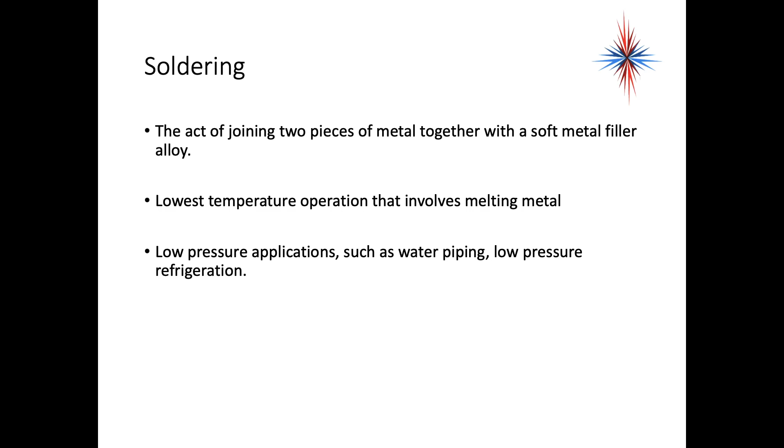For good capillary attraction, there should be a space between the metals of about 0.003 inches—a very small gap. Solder is a soft filler metal. Capillary attraction is when the liquid metal is pulled into a small crevice on its own, or with a little help, like putting a heat source on it. Solder flows between the two metals with capillary attraction.

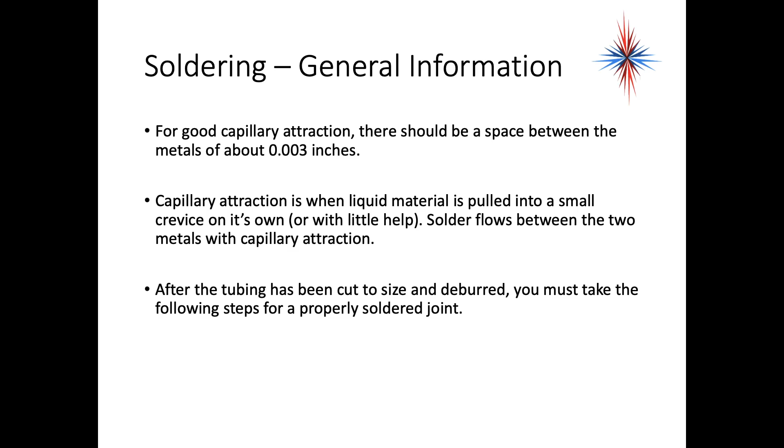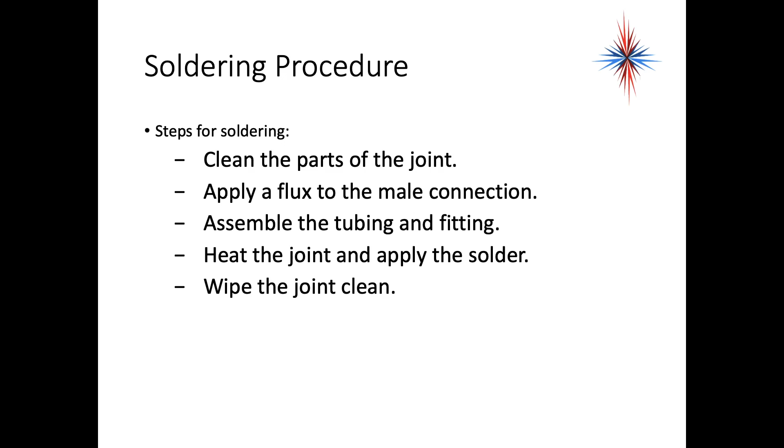After the tubing has been cut to size and deburred, there are specific steps you have to take for properly soldering a joint: clean the parts of the joint, apply flux to the male connection, assemble the tubing and fittings, heat the joint and apply the solder, and wipe the joint clean. All of these must be accomplished.

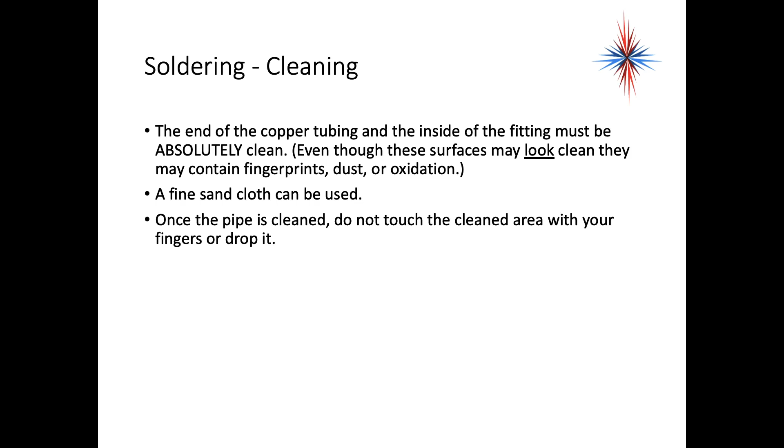The end of the copper tubing and the inside of the fitting must be absolutely clean. Even though these surfaces may look clean, they can contain fingerprints, dust, or oxidization. A fine sand cloth can be used. Once the pipe is cleaned, do not touch the cleaned area with your fingers or drop it—you'll make it dirty again.

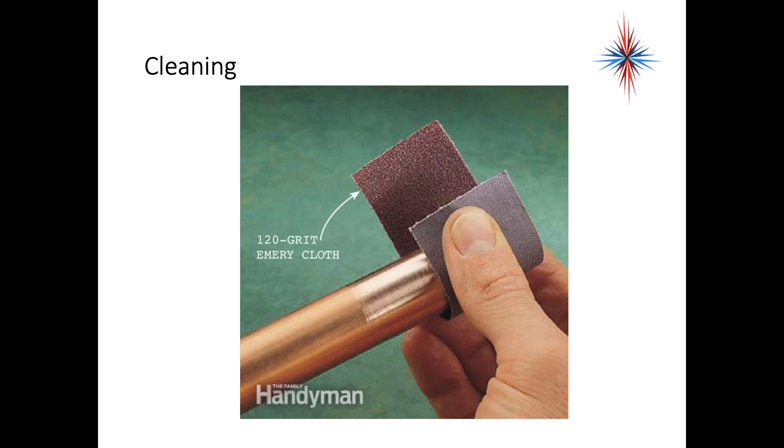So once again, we're using 120 grit emery cloth paper and sanding down the outside. If you can see any areas that are not like the clean metal shown in this slide, your pipe is not clean enough—it has to be perfect. Clean the inside of any fittings as well, using a wire brush or a rolled up piece of emery cloth.

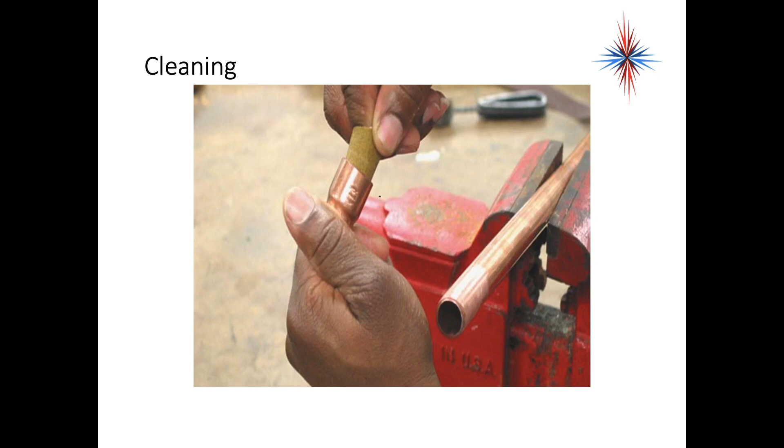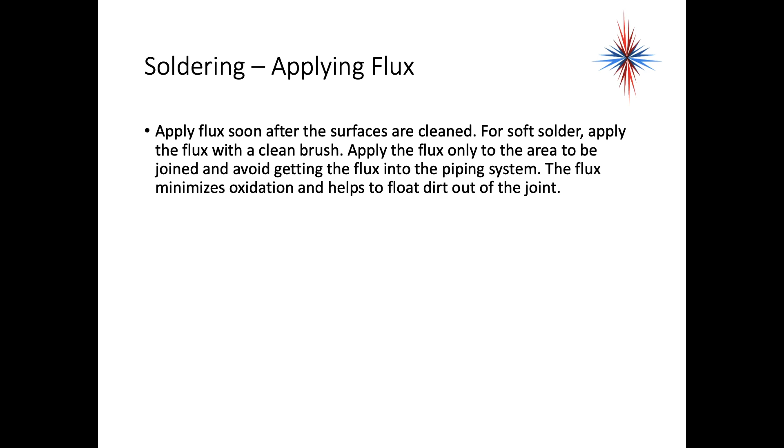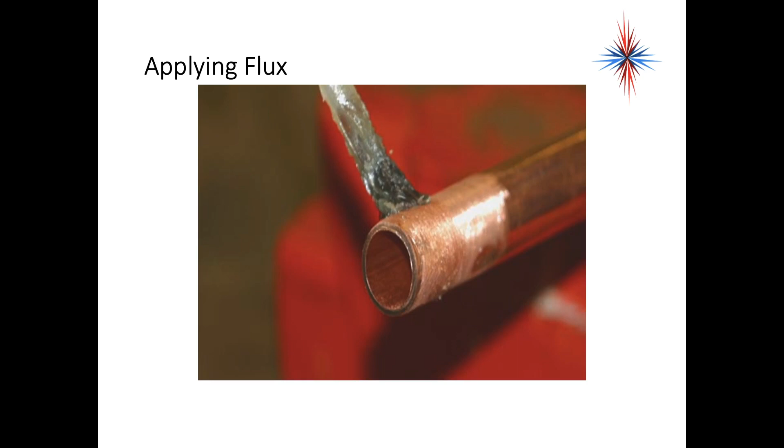Apply flux as soon as you clean the surfaces. For soft solder, apply the flux with a clean brush, only to the area to be joined, avoiding getting flux into the piping system. The flux minimizes oxidization and helps float dirt out of the joint. Always put it on the male end of the fitting, not on the female components. You don't need a ton of it, but it needs to be coated properly.

Soon after the flux is applied, assemble and support the joint so it's straight and will not move while being soldered. Solder cannot handle moving parts while it is cooling—it needs to be straight and supported.

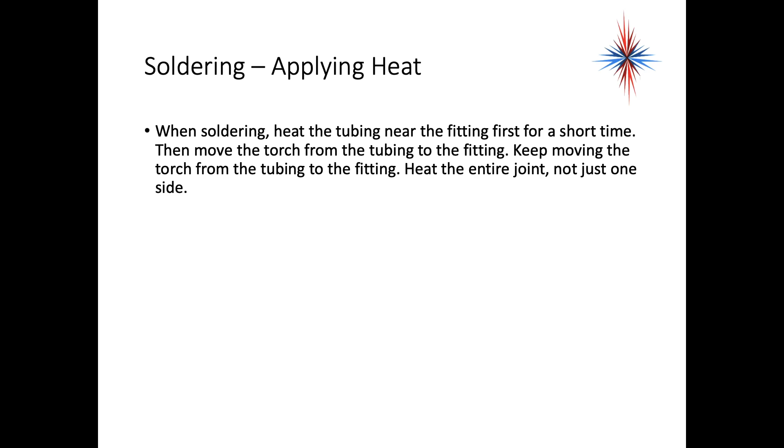When soldering, heat the tubing near the fitting first for a short time, then move the torch from the tubing to the fitting, back and forth, heating the entire joint, not just one side. Spread the heat evenly and do not overheat any single area. Don't point the flame into the fitting socket—hold the torch so the inner cone of the flame just touches the metal.

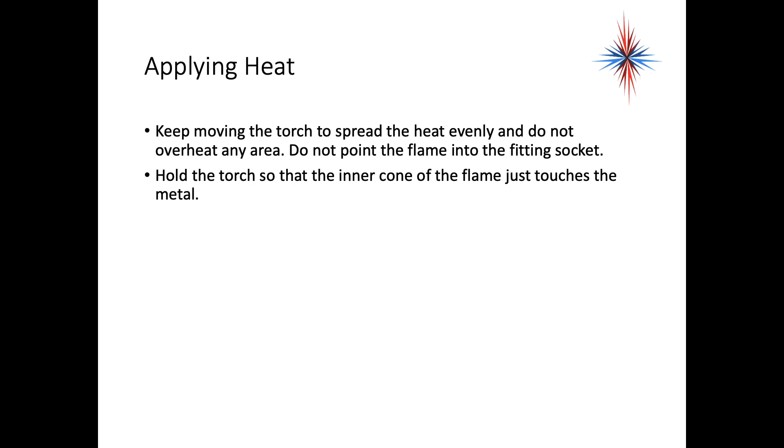Continue to test the heat of the metal with solder. Do not melt the solder with the flame—use the heat in the metal. When the solder flows freely from the heat of the metal, feed enough solder in to fill the joint. Don't use excessive solder; you don't want it dripping all over the place. Solder will normally flow towards the heat source, so if you move the flame up a little onto the outside of the fitting, it will help pull the solder towards it.

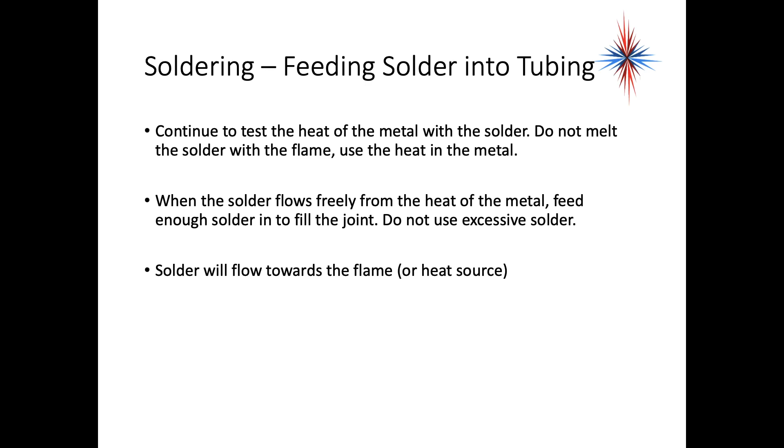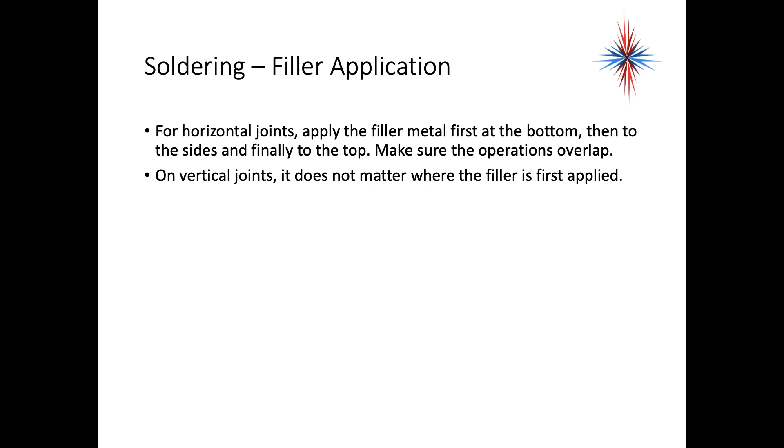For horizontal joints, apply the filler metal first at the bottom, then to the sides, and finally to the top, making sure these operations overlap so you don't leave any spaces. On vertical joints, it doesn't matter where the filler metal is first applied, because it's going to flow around.

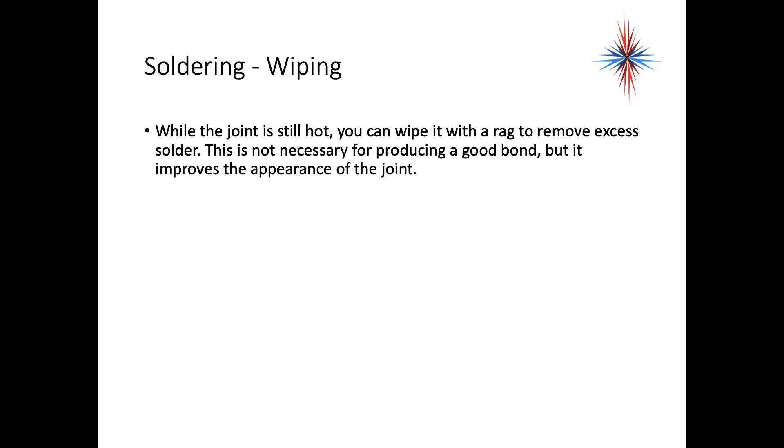So again, your steps are: clean the piping, apply the flux, apply the solder, and then as the metal is cooling, once the solder has cooled, get a damp cloth and wipe it down. While the joint's still hot, you can wipe it with a rag to remove excess solder and flux. It's not necessary, but it improves the appearance of the joint and makes it look neater.

We have one additional type of piping we want to talk about. Hard-drawn copper piping is manufactured in 10 or 20-foot lengths that are not intended to be bent. This material is commonly used when long, straight piping runs are needed, such as in the installation of a condensate line. If the piping arrangement must bend up, down, or side to side, pipe fittings must be used to create the desired turns or leveling.

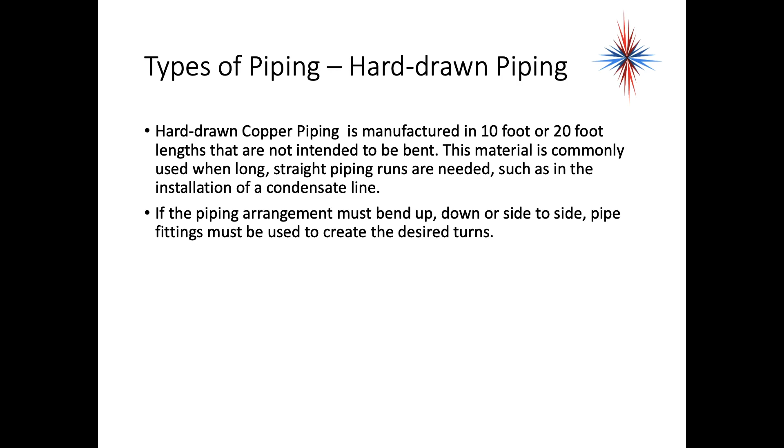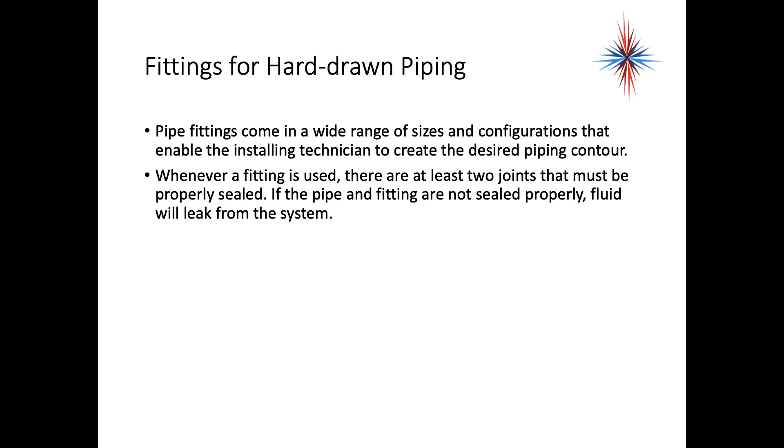Pipe fittings come in a wide range of sizes and configurations that enable the installing technician to create the desired pipe contour. Whenever a fitting is used, there are at least two joints that must be properly sealed. If the pipe and fitting are not sealed properly, fluid or gases will leak from the system. One drawback of using hard-drawn piping is an increased chance that the system will develop leaks due to the increased number of joints in the circuit—the more solder joints you have, the more chances for leaks.

Remember, the other type of tubing we've already talked about is soft-drawn ACR tubing. If you can use that at a reasonable cost, and if you have to do a lot of bends and turns, use the soft-drawn tubing, because it will be much better in terms of the number of fittings you need and the reduced chances for leaks.